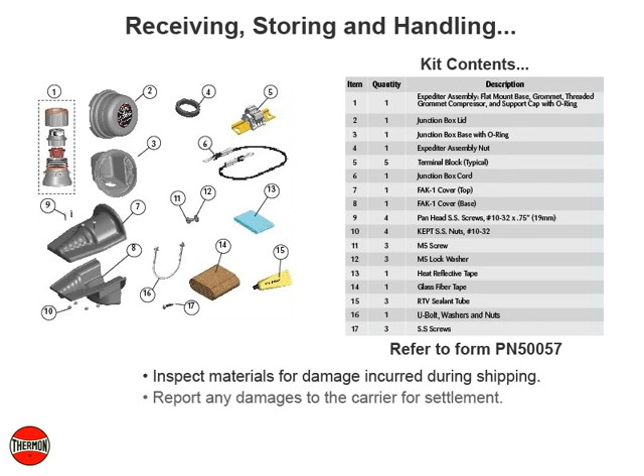Receiving, storing, and handling. Inspect materials for damage incurred during shipping. Report any damages to the carrier for settlement. Identify parts against the packing list to ensure the proper type and quantity have been received. And, store in a dry location.

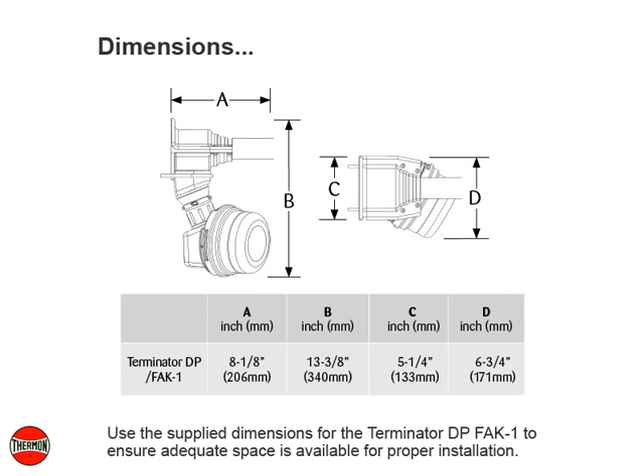Use the supplied dimensions for the Terminator DP FAK-1 to ensure adequate space is available for proper installation. The following kit is required for power and end terminations of electrically heated TubeTrace bundles. One kit is needed per heater and must be ordered separately. Refer to Form PN 50132.

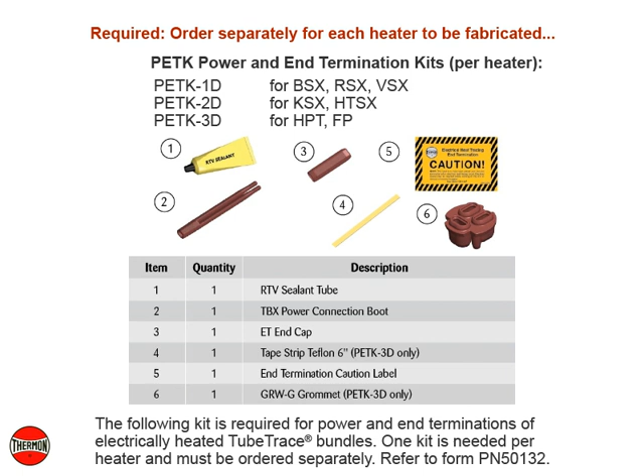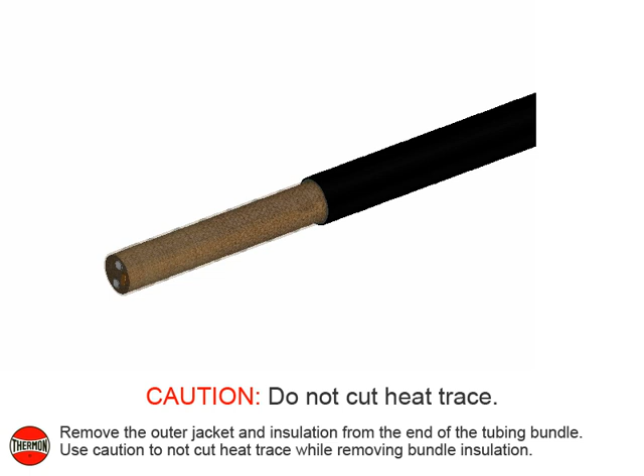Remove the outer jacket and insulation from the end of the tubing bundle. Use caution to not cut heat trace while removing bundle insulation. Ensure a minimum of 457 mm or 18 inches of heat trace is available for electrical connection.

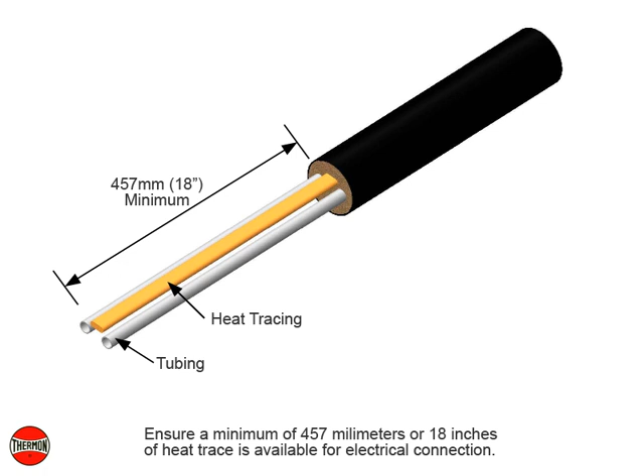For zone-type heat tracing, the bus connection should be located within 50 to 70 mm or 2 to 3 inches from the end of the bundle insulation. If the bus connection is not visible, proceed stripping the bundle insulation to the next indentation.

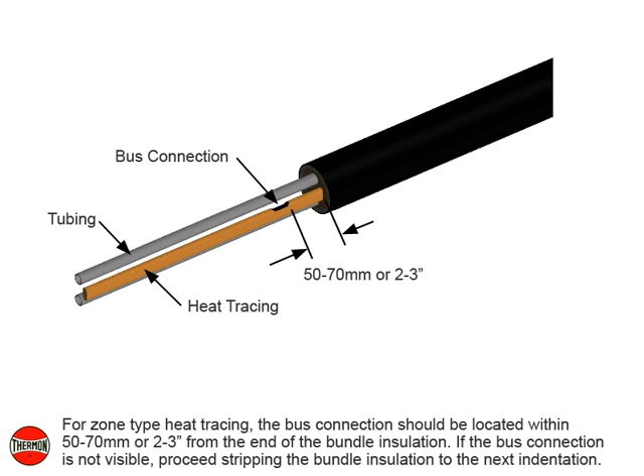Separate heat tracing from tubing and bend 90 degrees. Wrap tubes and heat trace with one pass of heat reflective tape with 25% overlap. Then, wrap with 3 passes of glass fiber tape, with 50% overlap, or until fiber tape is equal to original bundle insulation thickness. Complete with 1 additional pass of heat reflective tape.

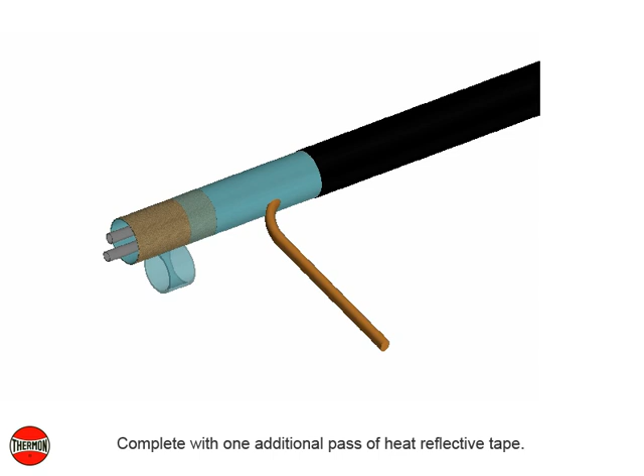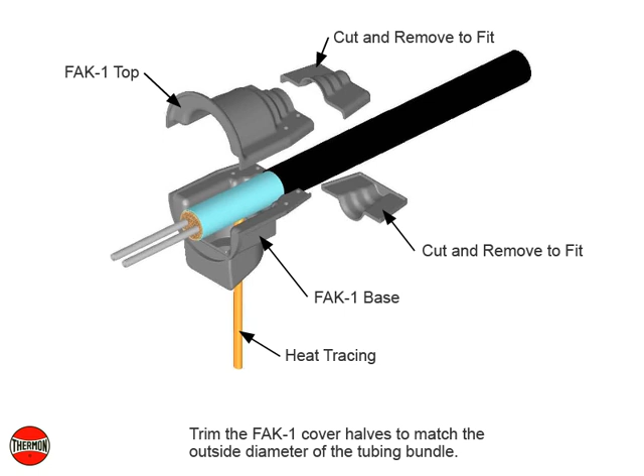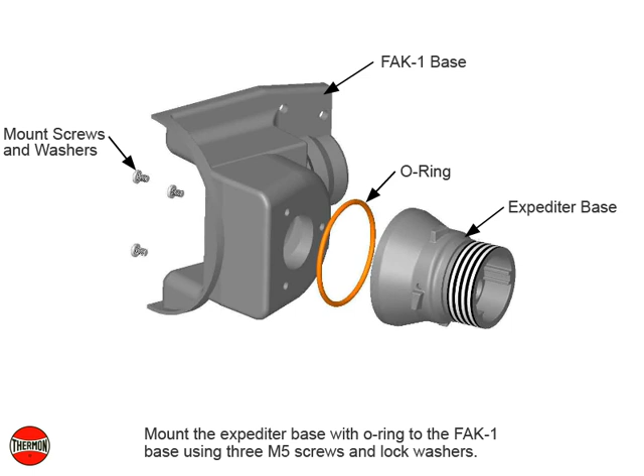Trim the FAK-1 cover halves to match the outside diameter of the tubing bundle. Mount the expediter base with O-ring to the FAK-1 base using 3 M5 screws and lock washers. Apply RTV sealant to both halves of the FAK-1 cover. Place the tubing bundle end in the FAK-1 base. Join the FAK-1 halves and secure with 4 panhead screws and nuts.

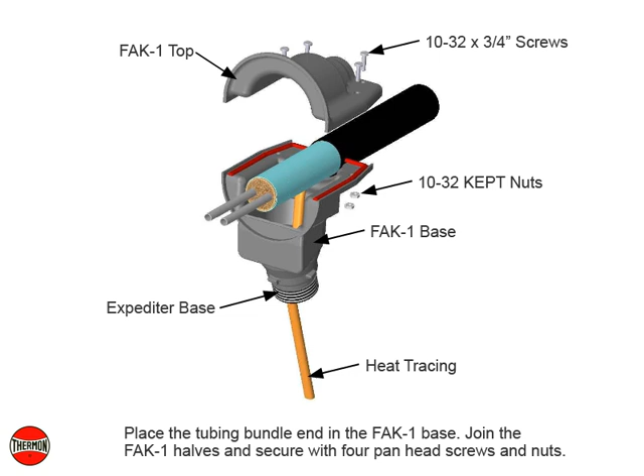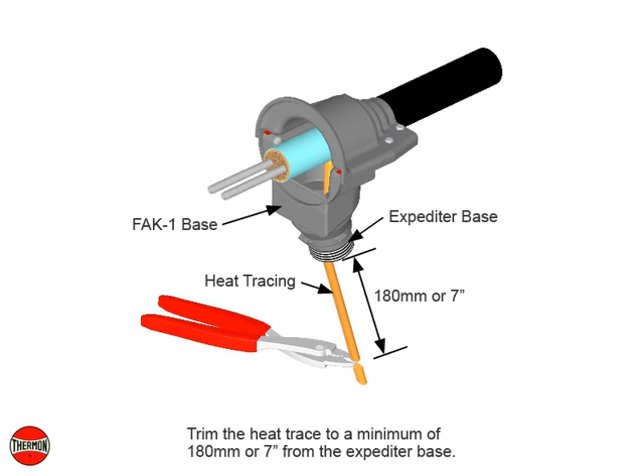Trim the heat trace to a minimum of 180 mm or 7 inches from the expediter base. Terminate the heat trace with the appropriate PETK termination kit. Refer to the PETK instructions for details not addressed here. At completion of termination, push excess cable back through expediter.

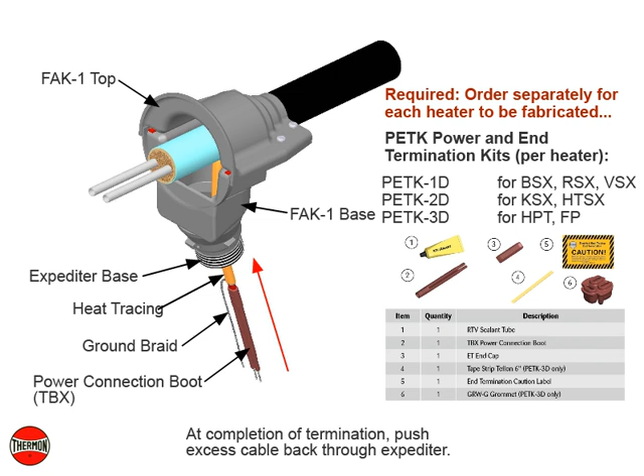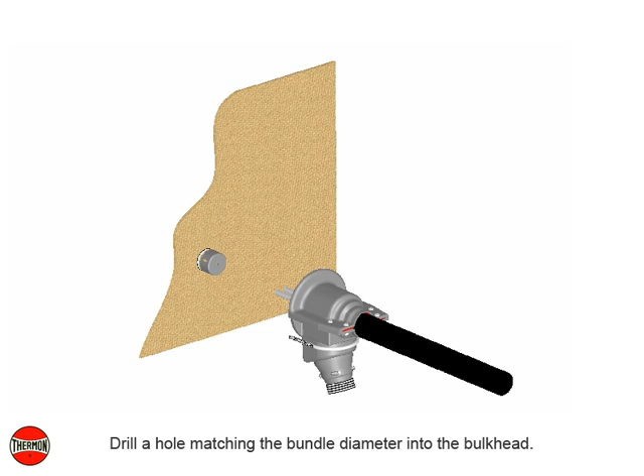Drill a hole matching the bundle diameter into the bulkhead. Mark the locations for U-bolt entry. Drill 1/4 inch or 7 mm holes through the bulkhead.

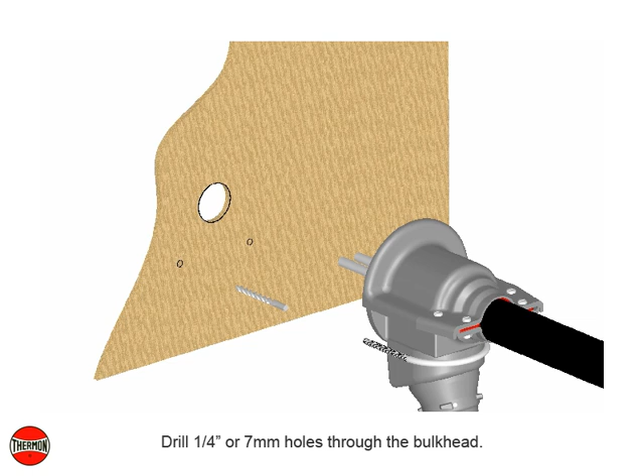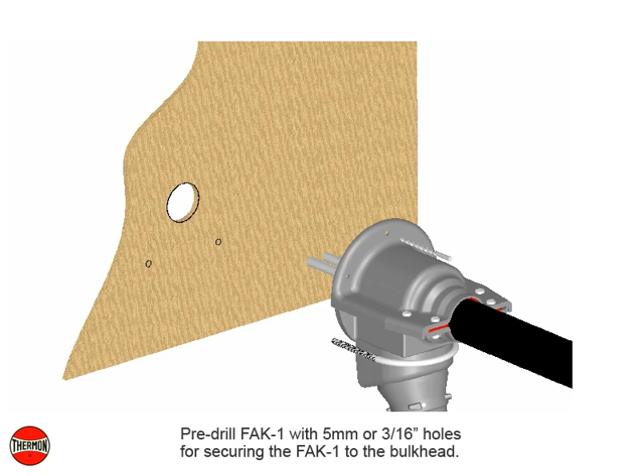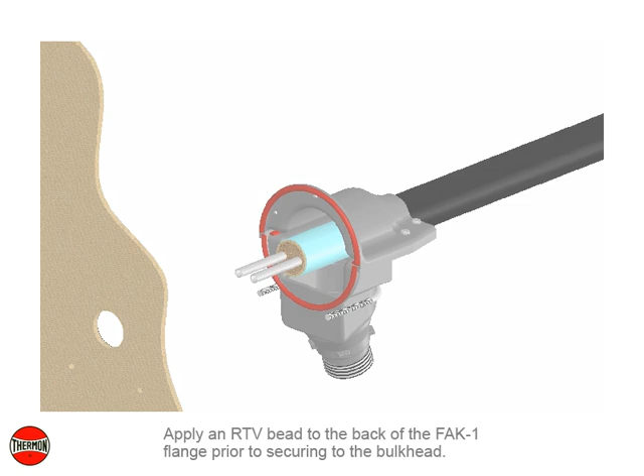Pre-drill FAK-1 with 5 mm or 3/16 inch holes for securing the FAK-1 to the bulkhead. Apply an RTV bead to the back of the FAK-1 flange prior to securing to the bulkhead. Secure the FAK-1 to the bulkhead using 3 stainless steel screws and U-bolt as shown.

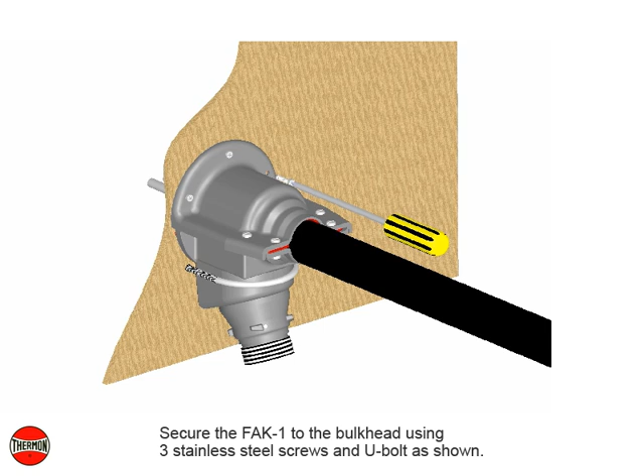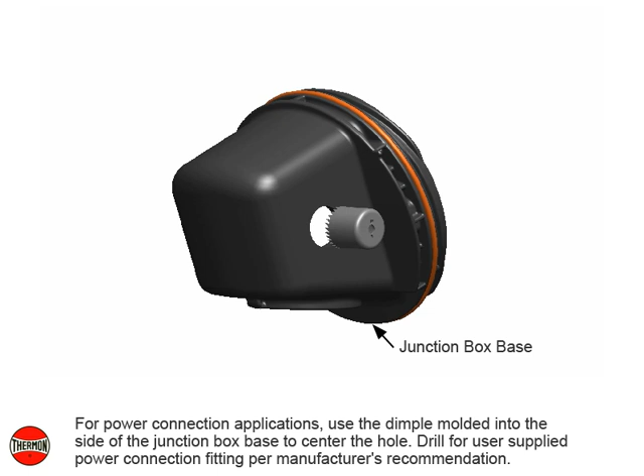For power connection applications, use the dimple molded into the side of the junction box base to center the hole. Drill for user-supplied power connection fitting per manufacturer's recommendation. Mount the junction box on the expediter, making sure to align the slots to properly orient the junction box base.

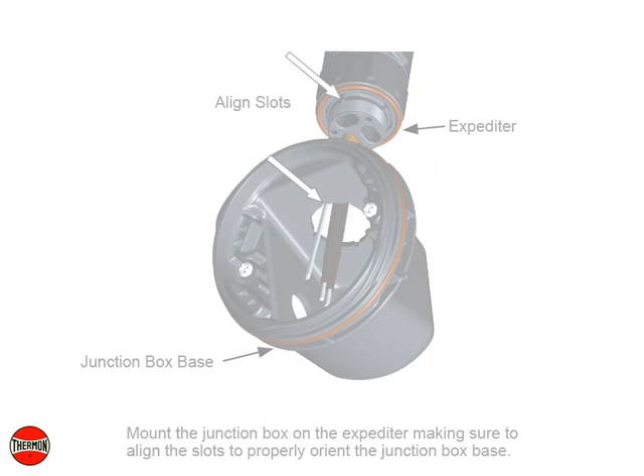Install the quick mount terminal block, twist to position and tighten. Complete system wiring between fabricated heat tracing and power supply wiring. Install the junction box lid and twist hand tight.

Insert a screwdriver into the ratchet slot located on the side of the junction box base to tighten. The lid will rotate 30 degrees. To remove the lid, repeat in opposite direction. Apply an RTV bead around the FAK-1 flange.

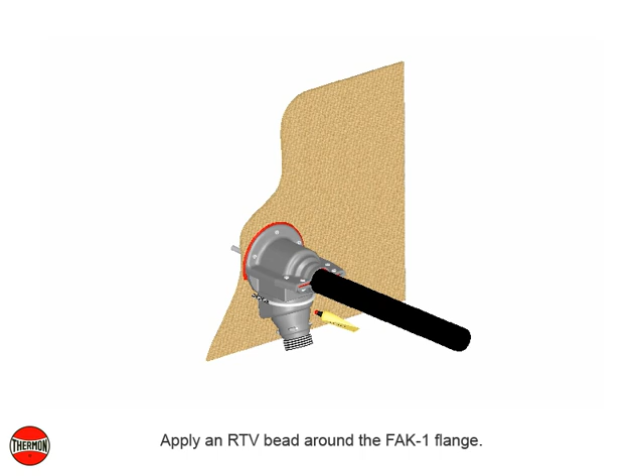Completed Terminator DP FAK-1 kit for bulkhead entry of electrically heated TubeTrace bundles.